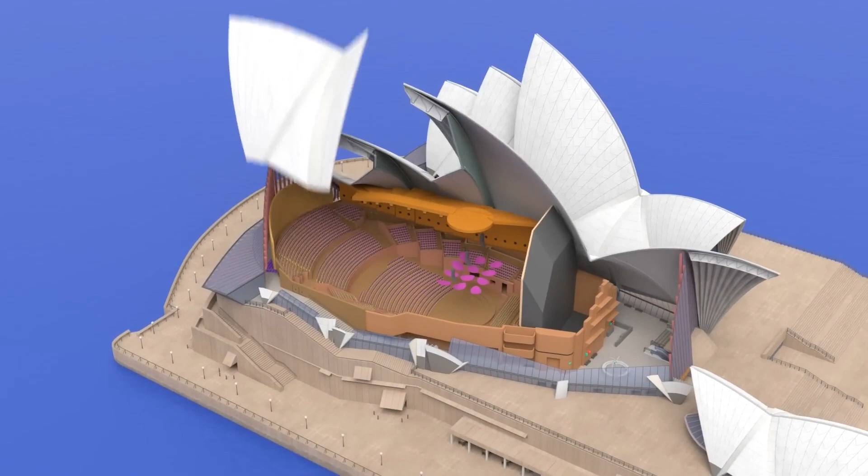Nestled on the edge of Sydney Harbour, the Sydney Opera House stands as a testament to human creativity and architectural genius. This iconic structure, with its distinctive sail-shaped design, has become an emblem of both Sydney and Australia, captivating the imagination of people worldwide. Designed by the visionary Danish architect Jørn Utzon, the Opera House is not just an architectural masterpiece, but also a vibrant cultural hub that has hosted countless performances and events since its inauguration.

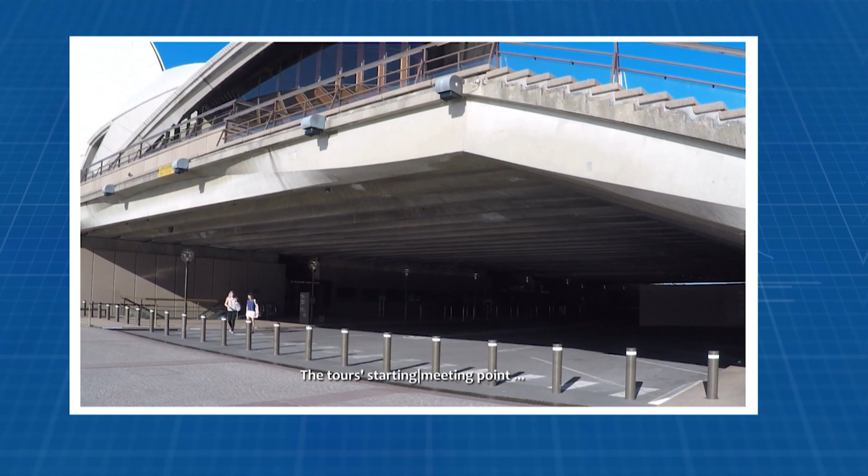In 2007, the Sydney Opera House was rightfully recognized as a UNESCO World Heritage Site, a designation that acknowledges its outstanding universal value. This recognition cements its status not just as an architectural wonder, but also as a cultural icon, embodying the artistic spirit and innovative drive. The Opera House's unique design and construction, along with its significant role in the cultural landscape, make it a symbol of both the creative ambition of the mid-20th century and the enduring allure of performing arts.

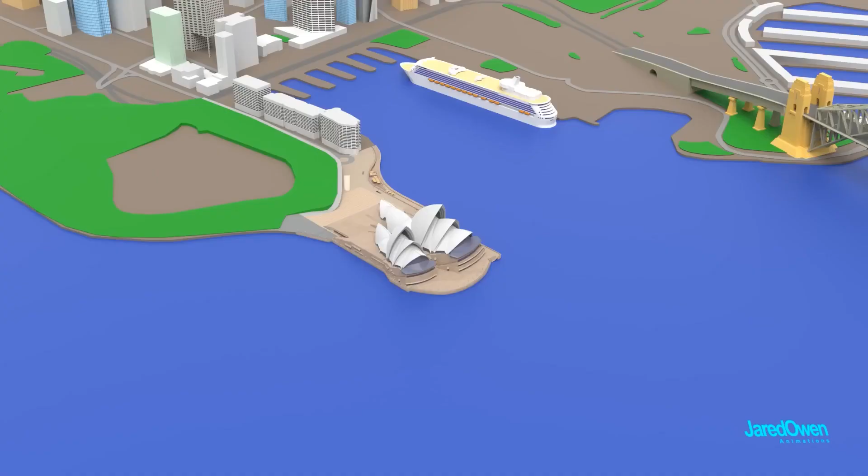The inception of the Sydney Opera House is a story of vision and ambition, epitomized by the genius of Danish architect Jørn Utzon. In 1957, Utzon's design was selected from 233 entries in an international competition, a decision that would forever change the skyline of Sydney. His innovative concept, featuring a series of shell-like structures, was not just groundbreaking, it was a leap into architectural uncharted waters. Utzon's design drew inspiration from nature and sails, symbolizing Sydney's rich maritime heritage.

The sail-shaped roofs of the Opera House are more than just an aesthetic marvel. They represent a fusion of art, architecture, and engineering. This visionary design challenged the conventional architectural norms of the time and required pioneering solutions to turn Utzon's vision into reality.

The uniqueness of the design presented considerable challenges, particularly in achieving the complex geometry of the shells. The construction process involved groundbreaking techniques and materials, pushing the boundaries of what was possible in the mid-20th century. The use of reinforced concrete for the structure, polarized glass with steel frames for the facades, and the iconic white and cream-colored matted tiles for the shells are testaments to the innovative spirit of the project.

The construction of the Sydney Opera House was a journey marked by ambition, challenges, and groundbreaking achievements. It began in 1959, a path paved with technological innovations and engineering feats that would extend over 14 years, significantly longer than the initial 4-year estimate.

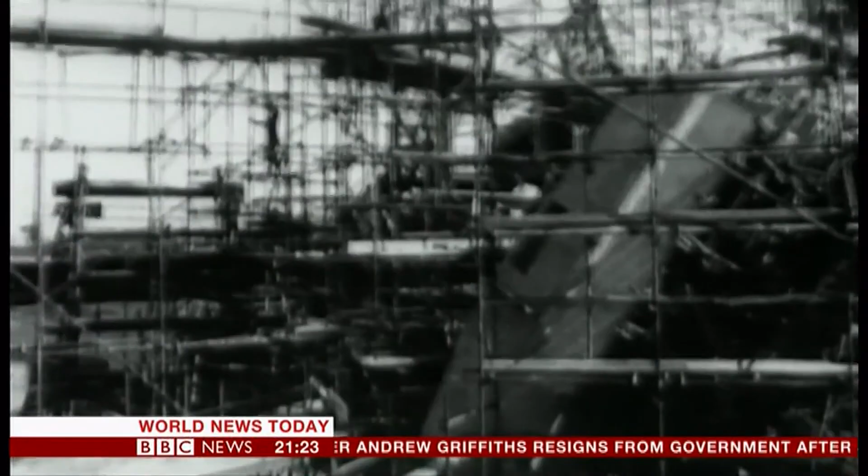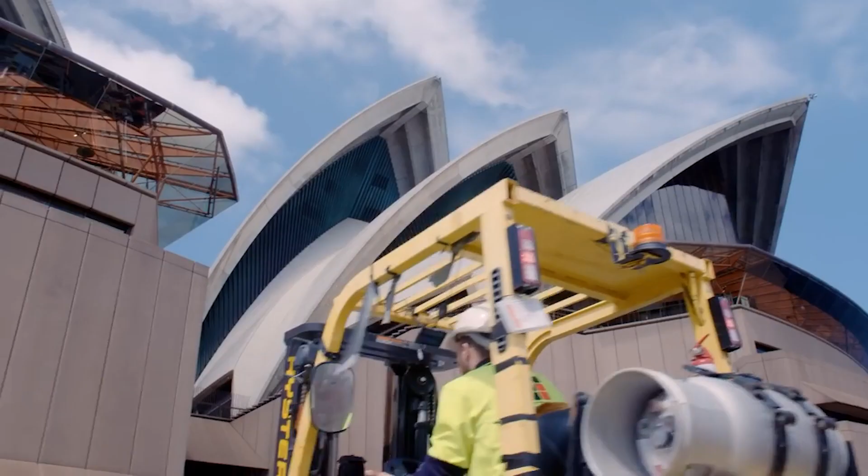One of the most significant challenges encountered was realizing Jørn Utzon's visionary design, particularly the complex geometry of the sail-like shells. The solution came in the form of a radical design change introduced by Utzon himself, where the shells were formed from sections of a sphere. This not only provided the aesthetic appeal, but also made the construction feasible.

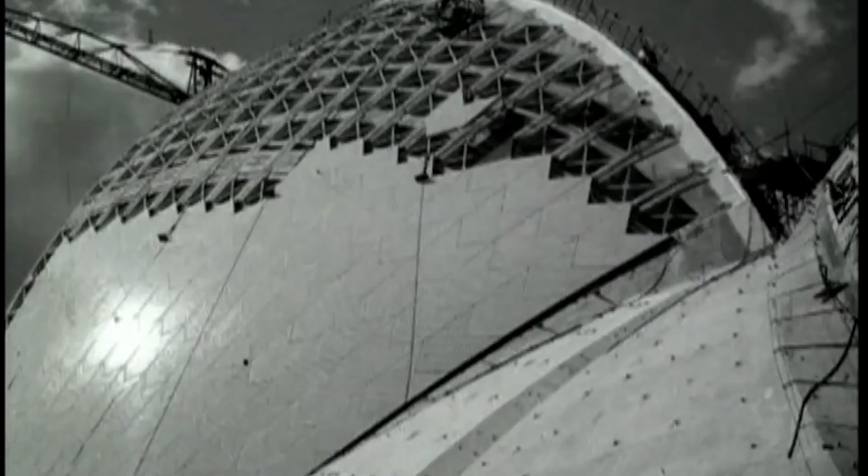A key player in this monumental task was the Australian construction company, Hornibrook. They played a crucial role in bringing Utzon's vision to life, particularly in the intricate task of constructing the roof's shells. The shells themselves were an engineering marvel, comprising 2,194 precast concrete sections, some weighing up to 15 tons, 33,069 pounds. To hold these massive pieces together, 350 kilometers, 217.48 miles, of steel wire were used, highlighting the enormity and complexity of the project. The roof, covered with over 1 million tiles made by the Swedish company Höganäs, presented its own set of challenges. These white and cream-colored tiles give the Opera House its distinctive shimmering appearance.

In addition, the vast glass walls, with a total area of 6,225 square meters, 67,000 square feet, add to the building's unique facade. The building's interiors were given equal attention to detail with materials like pink granite from Tarana and plywood from New South Wales, reflecting the local natural resources and craftsmanship.

This architectural marvel, stretching 183 meters (600 feet) in length and 120 meters (400 feet) in width, is a testament to the advanced engineering techniques of its time. A striking feature of the Opera House is its roof, composed of 2,194 precast concrete sections.

The roof is adorned with over 1 million tiles, sourced from Höganäs in Sweden. These tiles, in shades of white and cream, create the illusion of a uniform white surface from a distance, contributing to the building's iconic appearance.

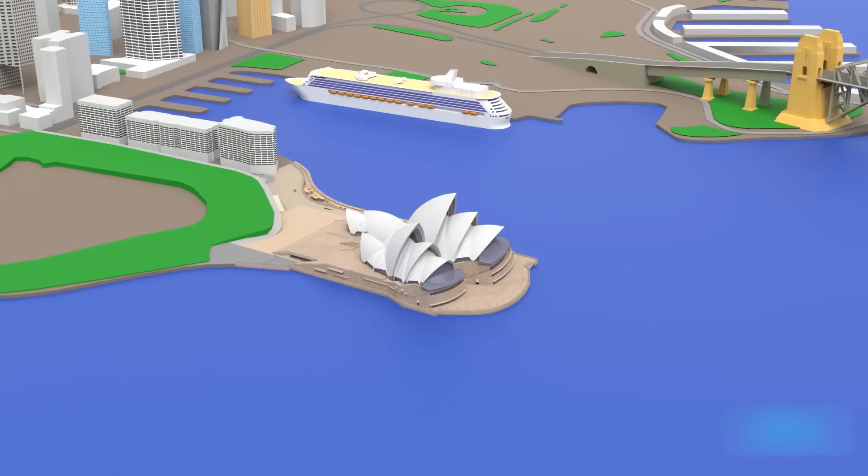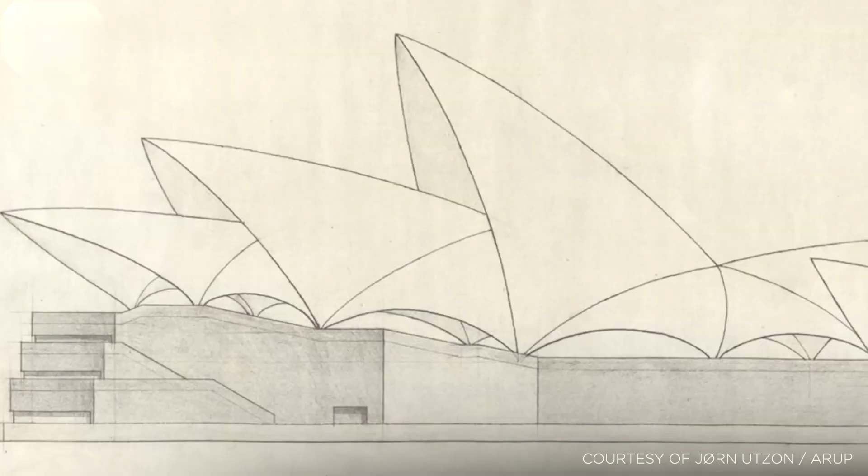The Opera House's facade is as impressive as its roof, featuring large glass panels set in steel frames. This extensive use of glass not only allows natural light to flood the interior spaces, but also offers panoramic views of the harbour.

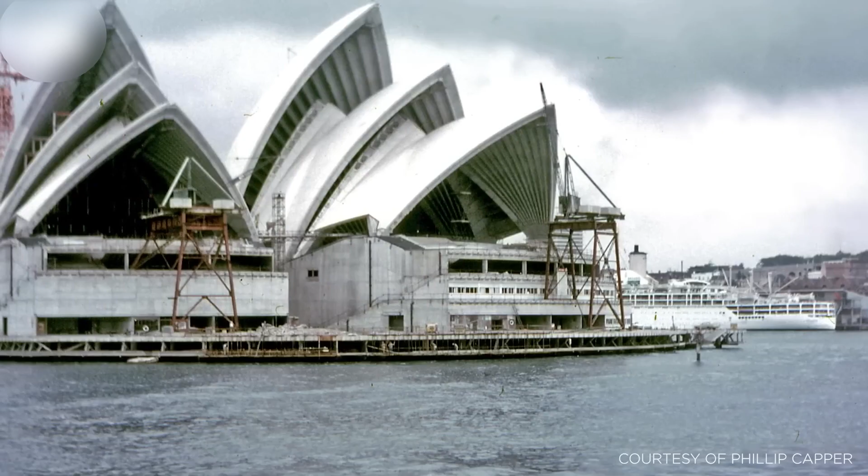Inside, the Opera House boasts materials of exceptional quality and local significance. Pink granite from Tarana adorns various interior surfaces, while specific areas feature plywood sourced from New South Wales, reflecting a deep connection with local materials and craftsmanship.

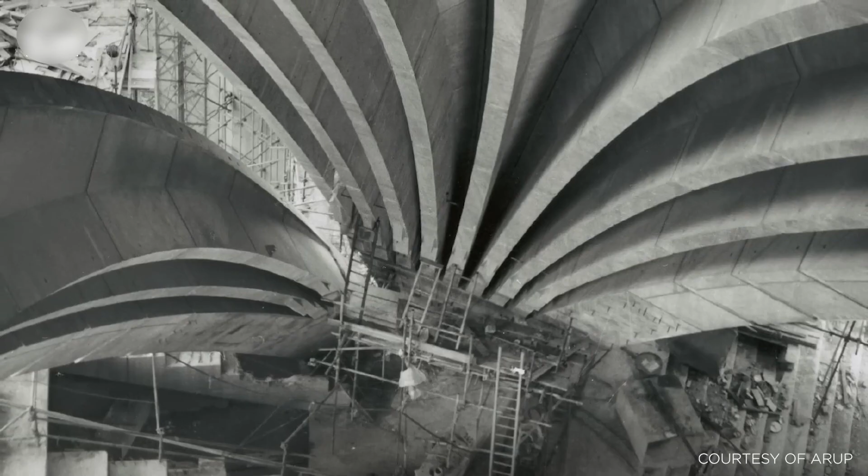The building is a labyrinth of technical prowess with 645 kilometers (400 miles) of electrical wiring intricately woven through its structure. This extensive network powers the Opera House's many functions, from lighting to sound systems.

In terms of size, the Sydney Opera House is an imposing structure. Its highest roof point is as tall as a 22-story building, and the entire site could accommodate 7 A380 aircraft wing to wing. This gives a sense of the grand scale at which the Opera House was conceived and executed.

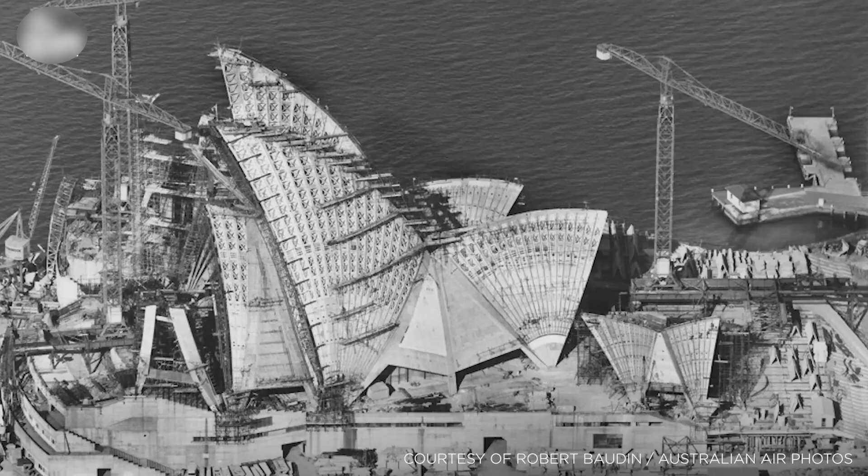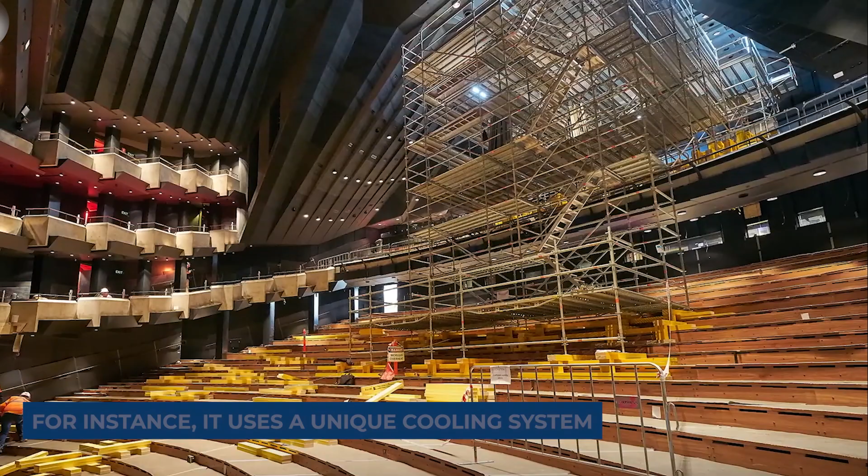Beyond its structural and aesthetic features, the building incorporates practical aspects for its maintenance and operation. For instance, it uses a unique cooling system that draws seawater directly from the harbour, utilizing 35 kilometers (22 miles) of piping. Moreover, to keep the Opera House well lit and functional, 15,500 lamps are replaced annually.

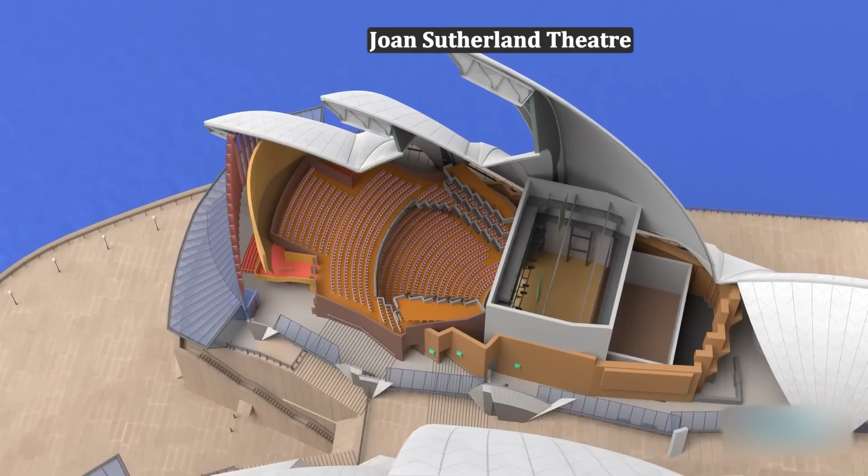The interior of the Sydney Opera House is as remarkable as its exterior, characterized by a blend of aesthetic beauty and acoustic excellence. The predominant use of pink granite from Tarana and native New South Wales plywood in the interiors showcases a commitment to local materials, imbuing the space with a sense of Australian identity. The choice of these materials also adds a warm, natural aesthetic to the interior spaces, complementing the modernist exterior.

The concert hall, the crown jewel of the Opera House, is world-renowned for its exceptional acoustics. This auditory wonder is achieved through the strategic use of materials and design. The hall is lined with special wooden panels, carefully designed to enhance sound quality. The arrangement and texture of these panels play a crucial role in distributing sound evenly throughout the space, ensuring that every note is heard with clarity and richness, no matter where one is seated.

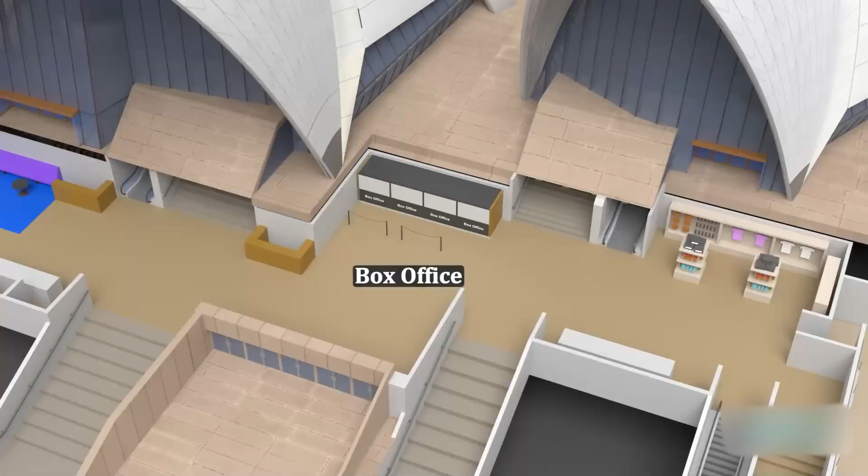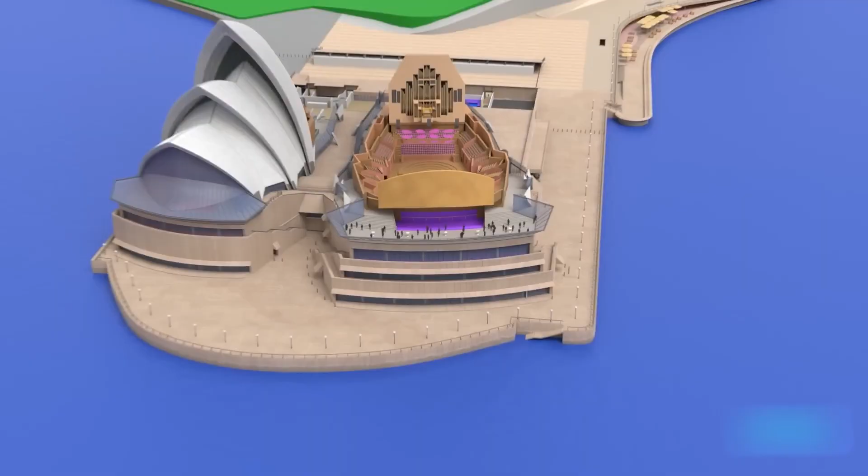Each of the multiple performance spaces within the Opera House, from the largest hall to the intimate Utzon room, is designed with specific acoustical requirements in mind. These spaces cater to a diverse range of performances, from grand operas and symphonies to smaller theatrical productions and recitals.

The Opera House incorporates state-of-the-art sound and lighting technology. This integration ensures that both traditional and contemporary performances are supported with the best technical facilities, enhancing the overall experience for performers and audiences alike.

A notable feature of the concert hall is the grand organ, the world's largest mechanical tracker action pipe organ. With 10,154 pipes, its construction and installation were feats in themselves, adding to the hall's unique character and sound.

Since its opening, it has been the stage for a myriad of significant events and performances, embodying the dynamic spirit of the arts.